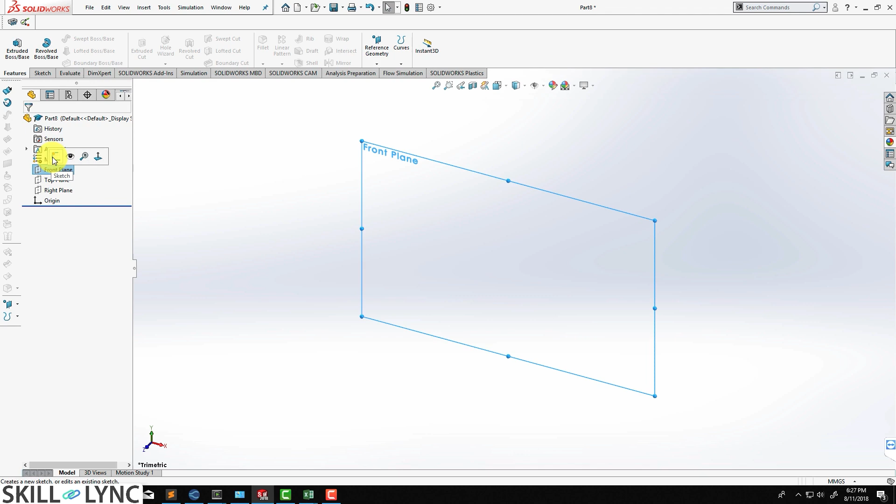We are going to start by creating a sketch on the front plane. So we use the circle tool, click and drag it out, and click one more concentric circle. We draw two more circles, slightly away from the first two circles. We can set up the distances later.

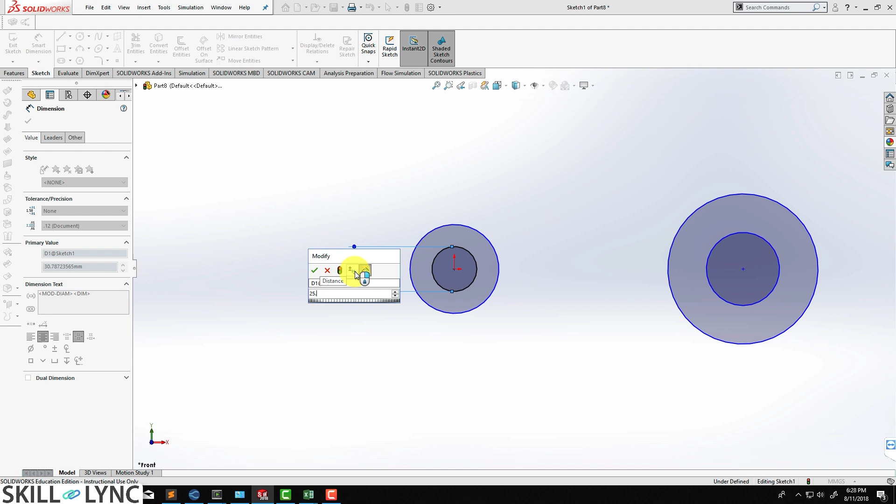Now we are going to assign the dimensions. Use the shortcut key S, select the inner circle and type in a value of 25.4 millimeters, then click OK.

Let's select the outer circle. Instead of directly specifying the diameter, we just provide the offset distance of 10 millimeters. Now the center for the other two circles is going to be situated at a distance of 212.5 millimeters.

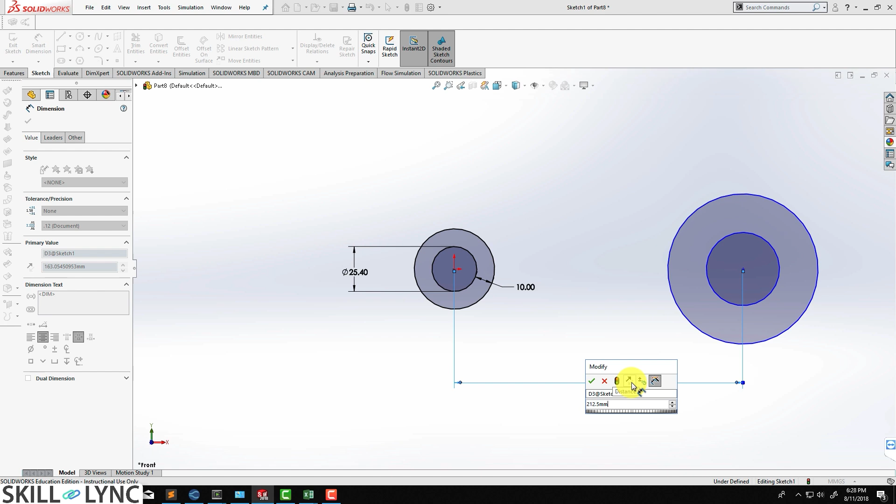Now we are going to select the inner circle on the other side, and this is where the crank is going to be located. So let's click on that and type in a value of 43.75 millimeters. As far as the outer circle is concerned, let's provide an offset distance instead of specifying a diameter, and put in a value of 20 millimeters.

The sketch is still underdefined, so what I'm going to do is select the center of this particular circle and this circle and hit make horizontal. Now our sketch is fully defined.

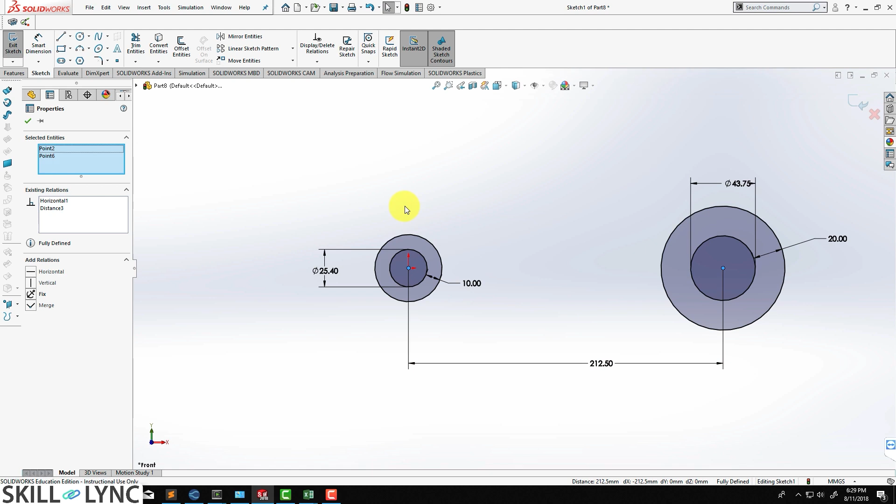Now we are going to basically draw two lines. Let's click here and drag it out till this particular point.

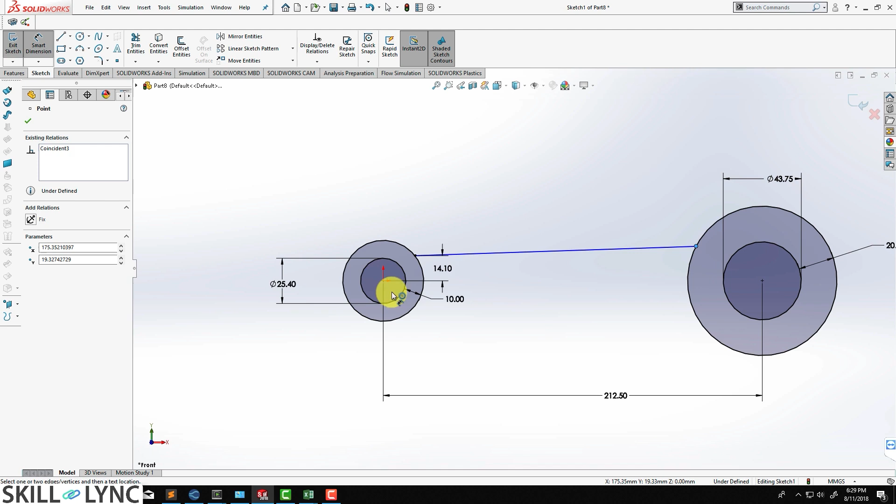Let's hit escape. Now we are going to say that the starting point of this particular line, so this point and this point, are at a distance of 14.1 millimeters - we are specifying the height. Similarly, on this side we are going to say that the distance is going to be 21.45 millimeters. Now we are going to mirror this particular line.

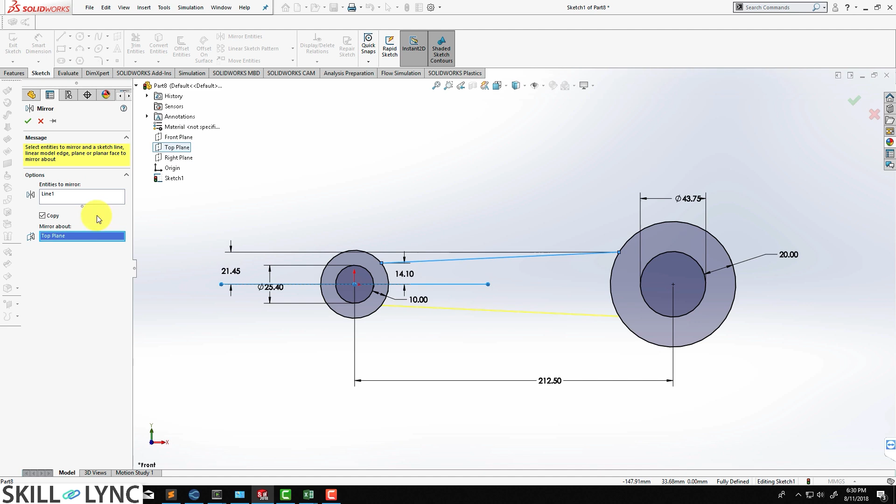Click on mirror entities and let's select this particular line, and to select mirror about we are going to be selecting a plane - let's select the top plane - and that's going to create a mirror copy of the line. Let's click OK.

Now we just need to trim off the unwanted parts. So let's go to trim entities and just trim this and this, and let's click OK.

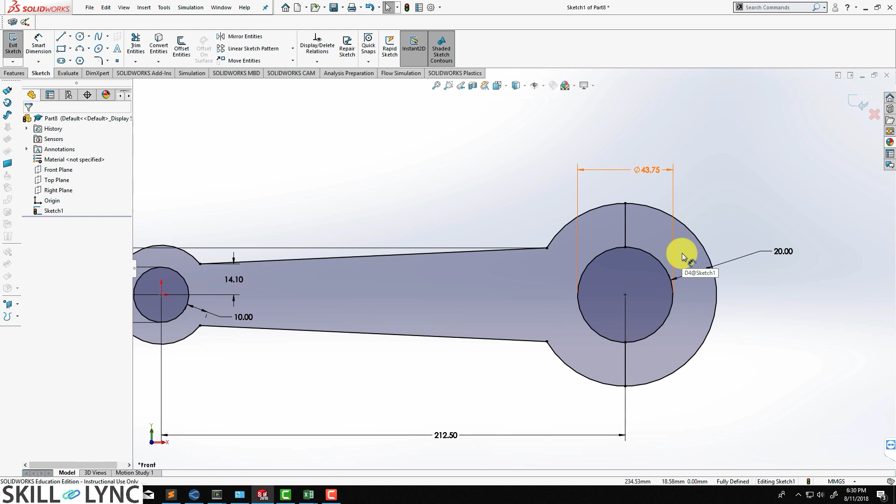Now we are going to use the shortcut key L to create a line, and we click a line like this, hit escape, hit L again to use the line tool, select here and select here, and hit escape. We are going to use the trim tool again and cut this particular portion.

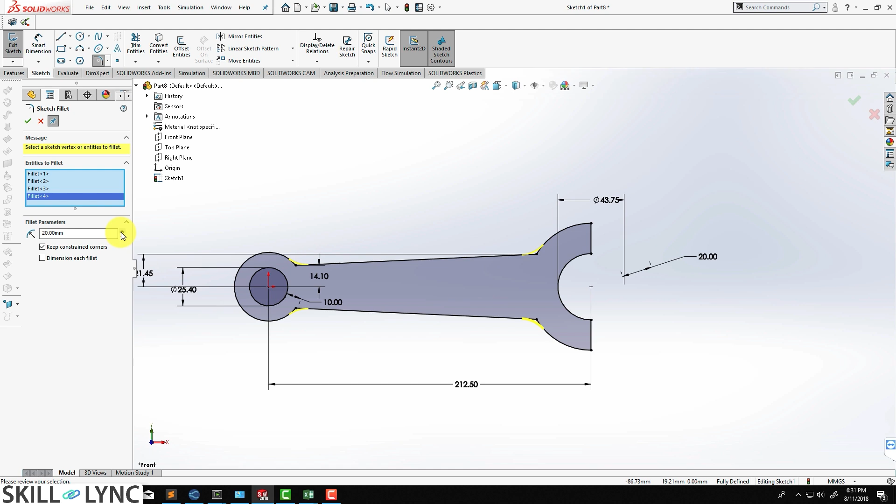You can see that we almost got the shape of our connecting rod. Before we extrude, let's add a fillet for our particular components. Select this point, this point, this point, and finally this point, and we are going to provide a value of 20 millimeters for the radius, then click OK.

Now let's exit the sketch and we are ready to extrude this particular shape. Let's click on extrude boss base, and we are going to be using the mid plane option.

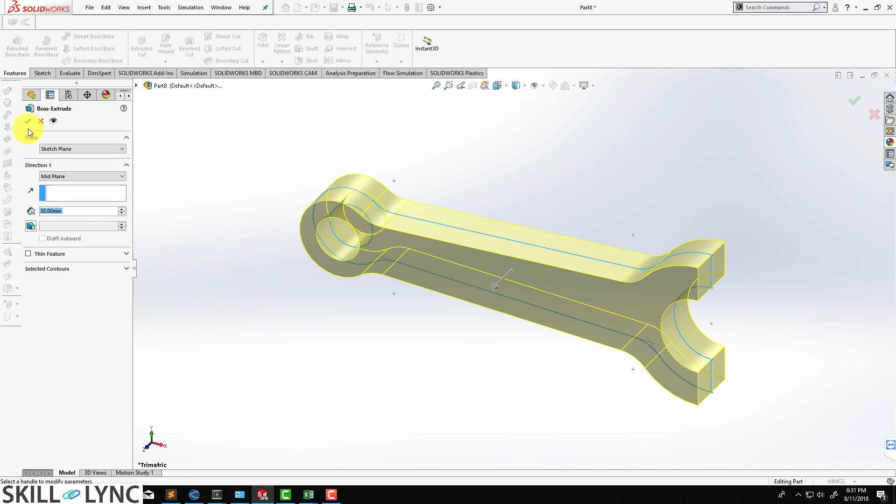So let's make sure that we select that, and then for the distance we are going to type in a value of 60 millimeters and click OK. This is going to create the top half of our connecting rod.

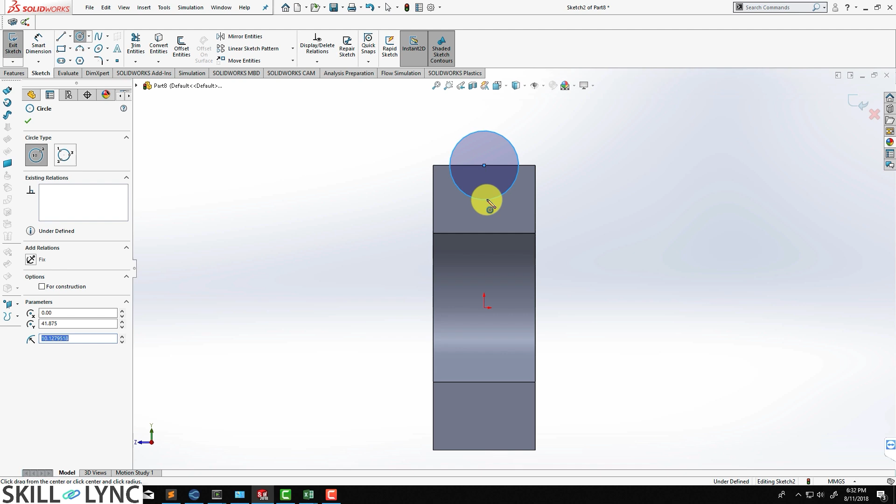Now we are going to be drawing grooves so that we can assemble the piston end cap. So let's select this particular face and click on sketch, hit Ctrl and 8 to view the sketch correctly. We are going to use a circle tool, click and drag it out, and let's hit escape. We are going to select the origin and the center of the circle and apply the make vertical constraint, and then we are going to apply the dimension, the diameter for the circle, and put in a value of 20 millimeters. You can see that the sketch is fully defined. Click on OK.

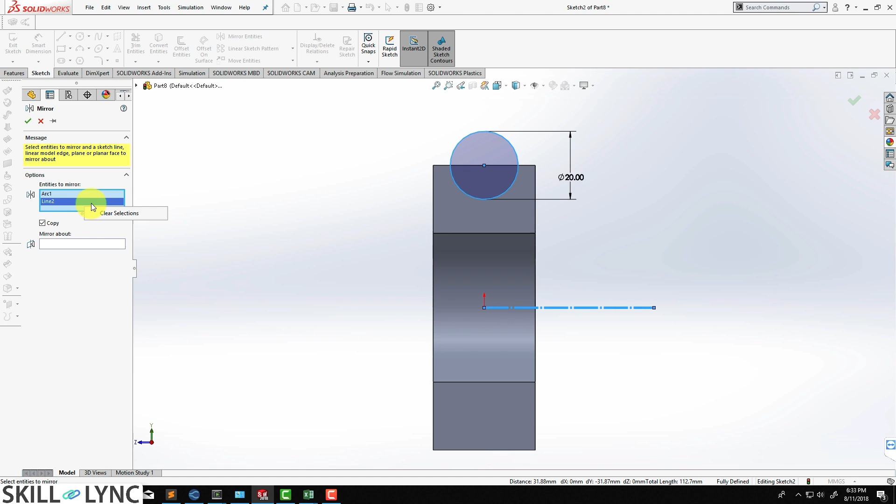And we are going to be drawing a horizontal line, and we are going to be mirroring the circle that we created. I'm using the shortcut key L to draw the line, and this particular thing needs to be construction geometry, so let's change that, and we are going to mirror the circle as I said. So let's go to the mirror entities tool, and we are going to select the top circle, and the mirror about is going to be the axis. Oh, oops, did it incorrectly. Let's delete the line and add it here. You can see that a preview appears, and there you go, we have mirrored it successfully.

Now we can exit the sketch, and we are just going to apply extruded cut. So first let's use extruded boss base and type in a value of 30 millimeters, and let's reverse the direction, and then let's hit OK.

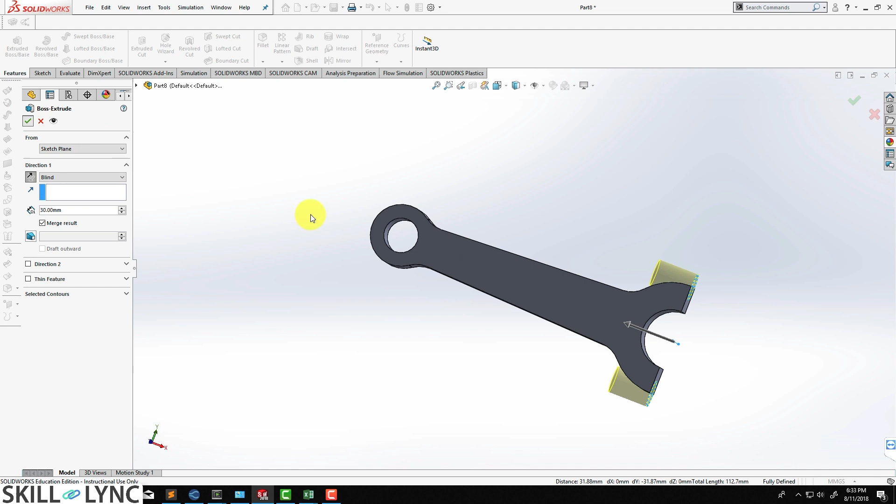Now we are going to be creating a groove cut on this particular face so that we can apply bolts later. So let's click on sketch in this particular plane, hit Ctrl 8 to view it in the right direction. And what we are going to do is fairly simple, right?

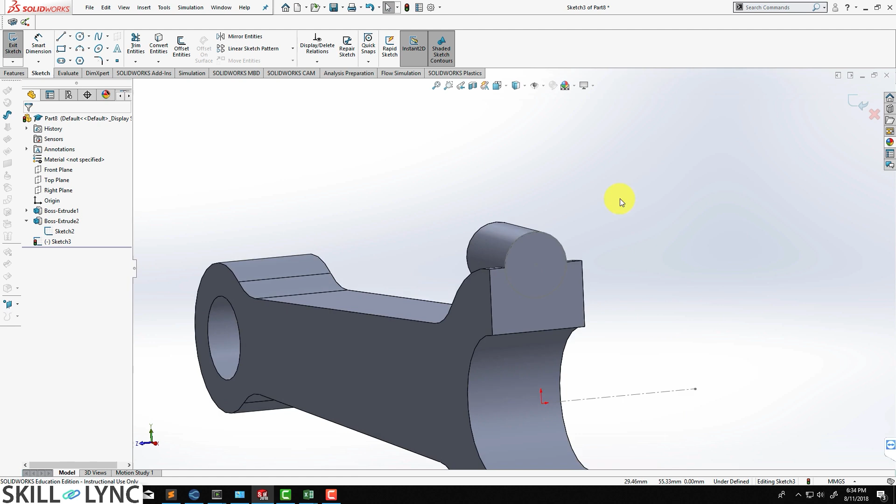So we are going to first select this particular sketch, and we're just going to click on show. Looks like it's there, but for some reason it's not visible. So we are going to draw a circle. Even though our circle is not visible, we should still be able to select the center of the circle. So let's just find that out, and we are just going to click there and drag it out, and we are going to provide a diameter to this circle. Let's type in a value of 11.25 millimeters.

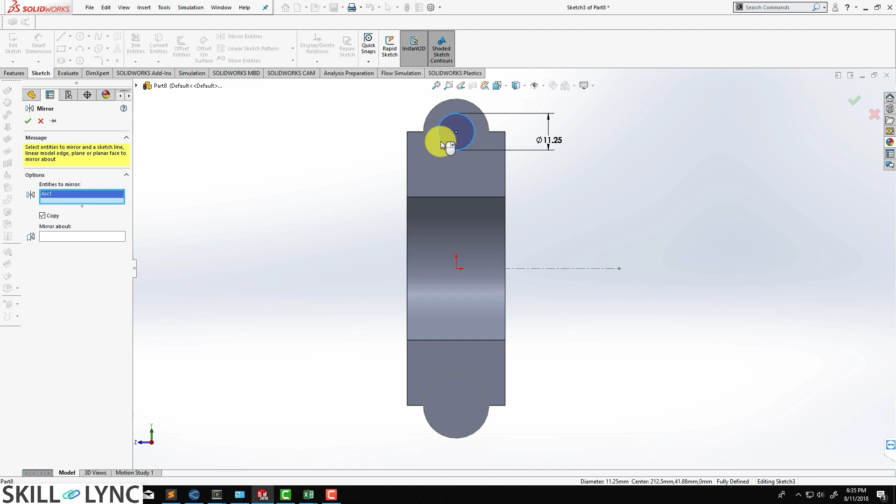Now we are going to mirror the circle just like before, and for entities to mirror, let's select the circle, and we are going to mirror about the top plane. So let's just click on the top plane and click on OK.

Let's exit the sketch, and now we are going to be applying extruded cut. I know that last time I said extruded cut, but we actually did extruded boss base. I hope that makes sense. So let's type in a value of 30 millimeters for the extruded cut, and you can see that the cuts are complete. So this is where the bolts would be going in.

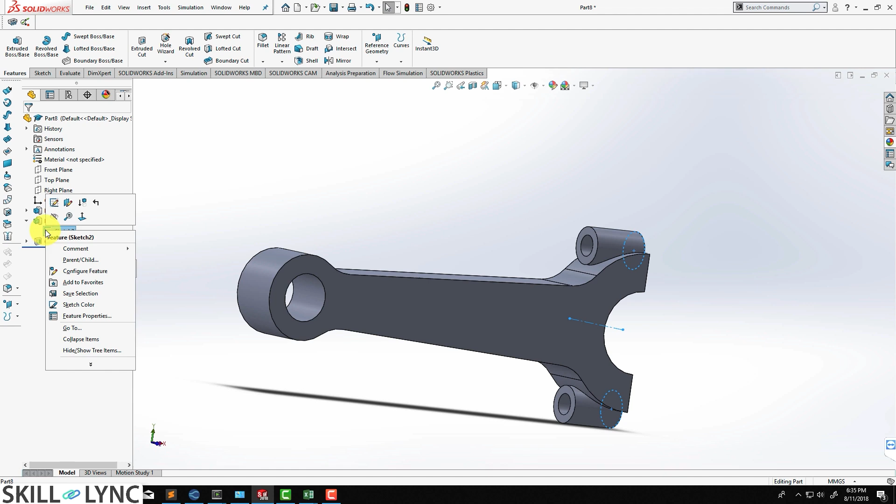Now we can hide the unwanted sketches. Let's just click on hide. Alright, so with that we have completed the major half of our connecting rod, right?

So in the next video we'll be looking at how to create the end cap geometry. Thank you. Bye.